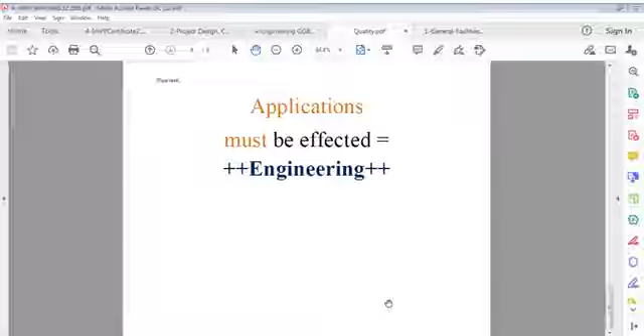Concentration has gone, I can say. Concentration is now relative, it's software. Software which has to be used as soft support. Actually, software has converted intellect into something which is useless. We have started thinking so much for software that software is my teacher, software my solution, and mind, intellectualism is defeated. This is my very much serious issue.

I am very much concerned about that. Whenever you see some posting, some design, something, they would say software says this, software says that. Are we living for software or is software working for us?

Computer is a tool everybody knows to assist us. But the state of its response is reverse. There is no contemplation now because templates are available. You can find templates on computers. They do their way and we think it's final.

I have not seen people talking of formalization. Take stat, take this, take that, use this, use that. So where do we stand? How shall our professionally developed minds work? In what way are we?

Are we just machines now? Are we just robots? Whatever we are given, we do? Or do we have a certain reliability coefficient, certain analytical coefficients, something empowered with us for synthesis.

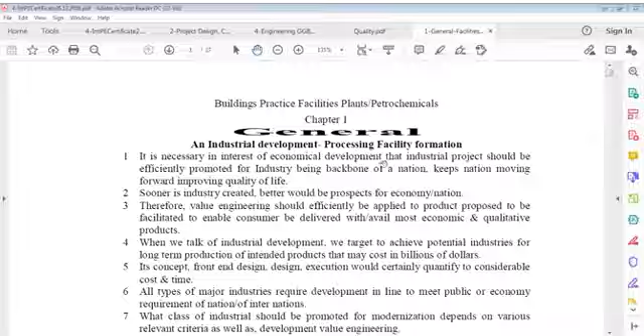I was somewhere, here if you see, I talked of this chapter 1, that was general. This chapter 1 was general, and what's this happening here? Industrial development projects and process facilities are talked of in this. And just to define why I'm talking about this, industrial development is very important. We talked of the policy decisions in this chapter. Then we talked of facilities requirement, facility justification and feasibility, and components. What components are available? What does it mean?

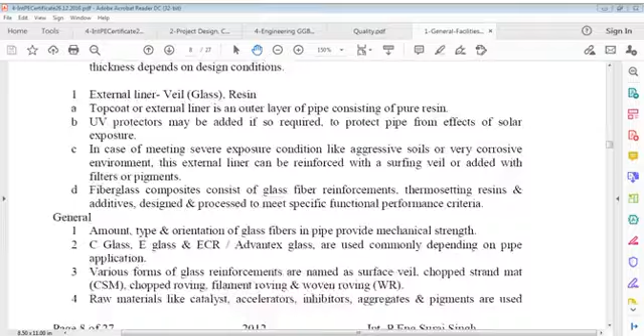And we talked of that, as well as LNG tanks, compressors, furnaces and other stationary equipment. Okay, we talked of FRP, GRP pipes. I think there were some supports also. We talked of RCC, receiving basin, etc. Flare towers, pump houses. I was somewhere here. So let us go back to where we have stopped.

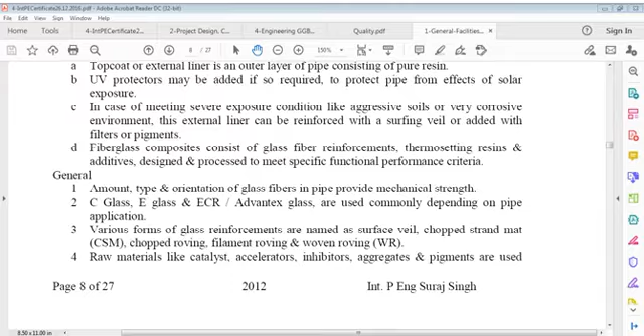We'll take a little overlapping here, because that reminds of the piping. FRP we discussed, layers we discussed generally, and also this. So pipe rack - okay, we come on to pipe rack. Let us start from there.

Pipe racks - I'm talking of industrial plants where tons and tons of structural steel is used, and hundreds of kilometers of pipes are laid, all classes of types. Pipe racks means these are structures, overground structures, ground structures, above overhead structures. These are like platforms on which pipes full of materials, full of whatever these pipes carry, of course, and these pipe racks are used to run those pipes, and this is throughout, you can say, on projects.

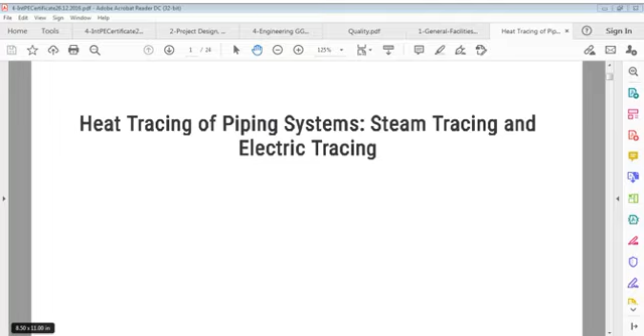In this heat tracing of piping system, we will cover types of pipe heat tracing, heat tracing design steps, general requirements for piping heat tracing system, description, and design requirements.

Pipe heat tracing is a generalized term relating to application of radiant heat input to piping systems from tubing attached to the outside of the pipe. Heat tracing is a process requirement.

Pipes carrying higher fluid temperatures than ambient temperature will lose temperature to surroundings. Insulation is a way to reduce this loss, but insulation is not 100% foolproof. So to make up that heat loss, small bore steam pipes or electrical wires known as heat tracers are attached to the parent pipe.

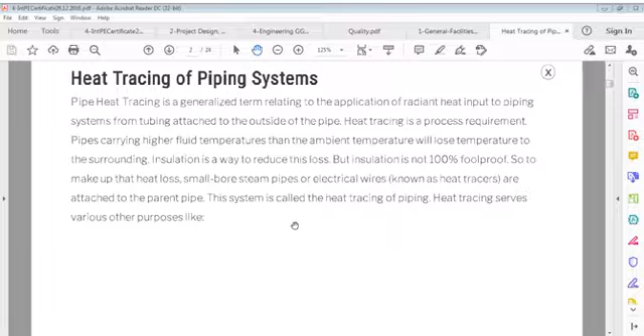This system is called heat tracing of piping. Heat tracing serves various other purposes, such as maintaining required temperature for process fluid, freeze protection, maintaining fluid viscosity, and snow and ice prevention.

Types of pipe heat tracing: Heat tracing can be grouped into two classes, fluid heat tracing or steam tracing, and electric tracing. In steam tracing of piping, steam is circulated through tubes that run alongside pipes to keep process fluid at desired temperature.

Other fluids like organics and glycols can also be used as tracing fluids. In heat tracing system design, however, there are various advantages of using steam as the heat tracing fluid, as mentioned below.

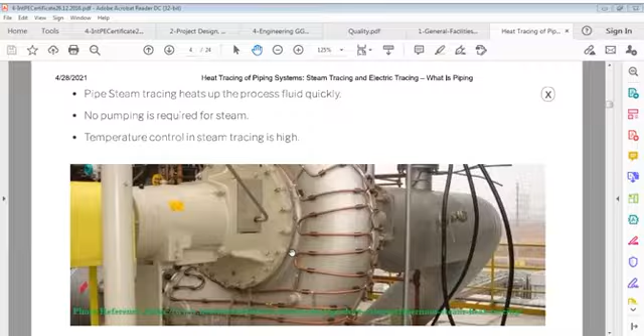Pipe steam tracing heats up process fluid quickly. No pumping is required for steam, and temperature control in steam tracing is high.

A steam tracing example is given here.

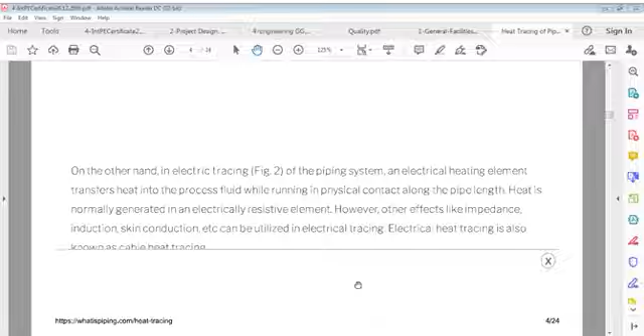Electrical tracing: in electrical tracing of piping systems, an electrical heating element transfers heat into process fluid while running in physical contact along the pipe length. Heat is normally generated in an electrically resistive element. However, other effects like impedance, induction, and skin conduction can also be utilized in electrical tracing. Electrical heat tracing is also known as cable heat tracing.

This is a reference given to the website for electric tracing, as you can see here.

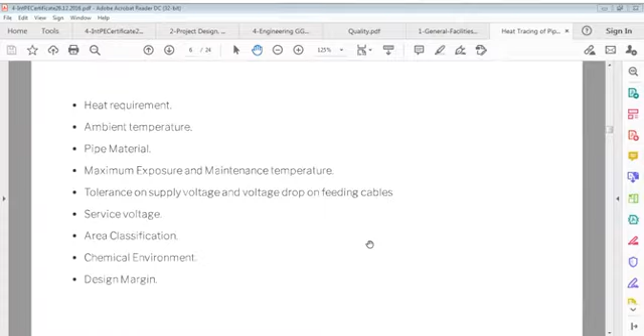Key design considerations include heat requirement, ambient temperature, pipe material, maximum exposure and maintenance temperature, tolerance on supply voltage and voltage drop on feeding cables, service voltage, area classification, chemical environment, and design margin.

Three types of pipe heat tracing cables are used for industrial electrical tracing systems: self-regulating polymer jacketed cables, mineral insulated cables, and skin effect heating cables.

Self-regulating polymer jacketed cables: these heat trace cables are suitable for temperatures up to 200 degrees Celsius and circuit lengths of up to 750 feet or 250 meters.

Mineral insulated heat trace cables are used for temperatures of 60 degrees up to 650 degrees Celsius, and circuit lengths of up to 3,300 feet, or approximately 1 kilometer.

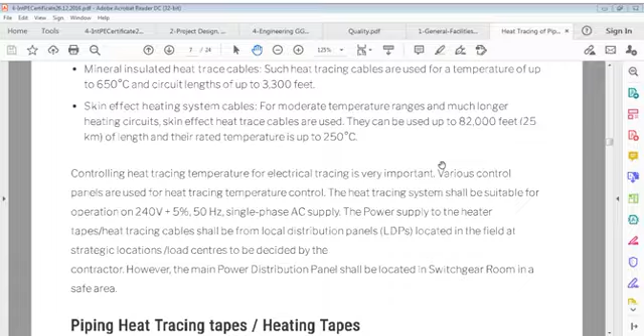Skin effect heating system: skin effect heat trace cables are used for moderate temperature ranges and much longer heating circuits. They can be used up to 25 kilometers in length, with a rated temperature of up to 250 degrees Celsius.

Controlling heat tracing temperature for electrical tracing is very important. Various control panels are used for heat tracing temperature control.

The heat tracing system shall be suitable for operation on 240 volts plus minus 5%, 50 Hz, single phase AC supply, providing power supply to the heater tapes.

Heat tracing cables shall be fed from local distribution panels (LDPs) located in the field at strategic locations, with load centers decided by the contractor. However, the main power distribution panel shall be located in the switchgear room in a safe area.

Piping heat tracing system.

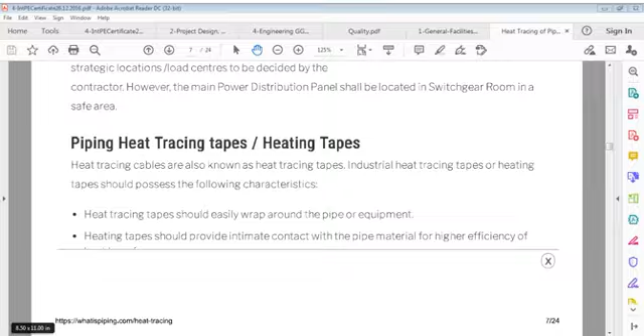Let us see where it is. Hold on, please. I'm here, hold on. Yeah, let's say yes. It's gone, it's missing, I think. Let's say yes.

Piping heat tracing tapes. Piping heat tracing tapes, heating tapes.

Heat tracing cables are also known as heat tracing tapes. Industrial heat tracing tapes or heating tapes should possess the following characteristics: the heat tracing tape should easily wrap around the pipe or equipment, and heating tapes should provide intimate contact with the pipe material for higher efficiency of the heat tracing tapes.

Efficiency of heat tracing tapes or heat tracing cables must be durable and long lasting. To prevent damage during overlapping, heat tapes should have a burnout proof feature. Heating tapes shall be suitable for use in areas defined in the process data sheet. Corrosion resistant metallic braid must be provided for safe and hazardous area applications. In hazardous area applications, surface temperature of heat tapes shall not exceed 200 degrees Celsius.

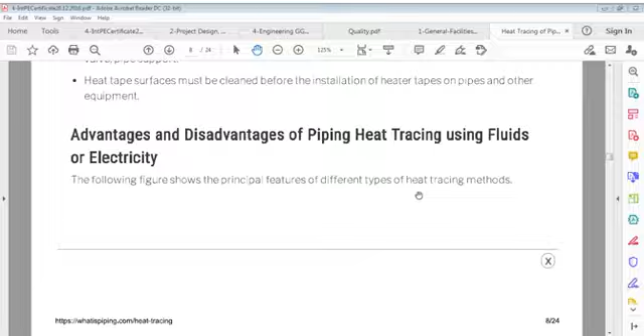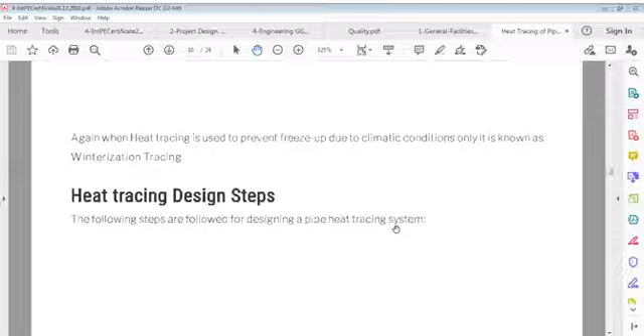When heat tracing is used to ensure that the system functions from a process standpoint regardless of climatic conditions, it's known as process control tracing. Again, when heat tracing is used to prevent freeze up due to climatic conditions only, it is known as winterization tracing. So there are two points: process control tracing, when heat tracing is used to ensure the system functions from a process standpoint regardless of climatic conditions, and winterization tracing, when heat tracing is used to prevent freezing up due to climatic conditions only.

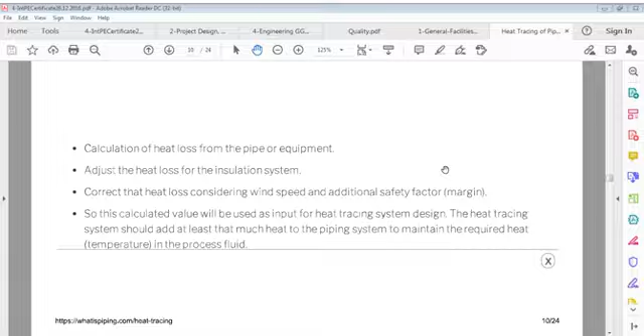Heat tracing design steps. The following steps are followed to design a pipe heat tracing system. I'm just giving a superficial study idea. Calculation of heat loss from pipe or equipment. Adjust heat loss for insulation system. Correct that heat loss considering wind speed and additional safety factor. This calculated value is then used as input for heat tracing system design. The heat tracing system should add at least as much heat to the piping system to maintain the required temperature in the process fluid.

General rule is steam tracing supply lines shall be taken from the top of the supply header to assure dry quality steam. This is a requirement, a rule for steam tracing. I'm just giving you this for general knowledge, you should know. I'm a civil engineer, so this isn't my job, but since we deal with plants and do so many things, these terms are very important sometimes. Steam tracing supply lines shall be taken from top of supply header to assure dry quality steam.

Identify locations for steam tracing supply manifolds and condensate manifolds early in design to reserve space in plant layout. This applies to non-steam supply and return manifolds such as hot oil, glycol, etc. Allow for an increase in insulation sizing to account for tracers.

Instrument application for heat tracing. Inline instruments can also be required to be heat traced as process conditions dictate. In that case, piping needs to provide steam supply and condensate collection manifolds for all other instruments. The break between piping traced instruments and control system traced instruments should match the drawing break between the two departments.

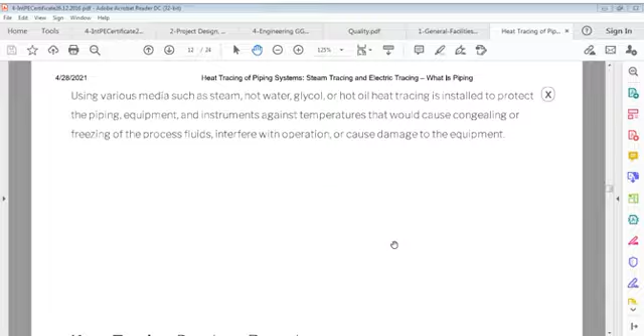Heat tracing design requirements. The daily average low temperature of the coldest month shall be used to select the low ambient design temperature, which then determines the degree of winterization protection required. No winterizing is required for water services except where a sustained temperature below minus 1 degree Celsius is often recorded for 24 hours or longer. Compressors, blowers and other mechanical equipment shall be specified for operation at the low ambient design temperature.

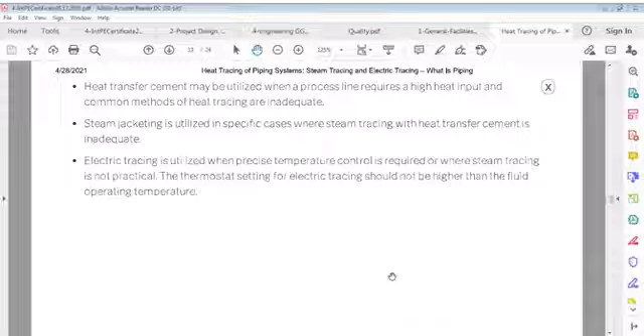Heat conservation while heat tracing. Heat transfer cement may be utilized when a process line requires high heat input and common methods of heat tracing are inadequate. Steam jacketing is utilized in specific cases where steam tracing with heat transfer cement is inadequate. Electric tracing is required or utilized when precise temperature control is required or where steam tracing is not practical. Thermostat setting for electric tracing should not be higher than the fluid operating temperature.

Thermostat setting for electric tracing should not be higher than fluid operating temperature.

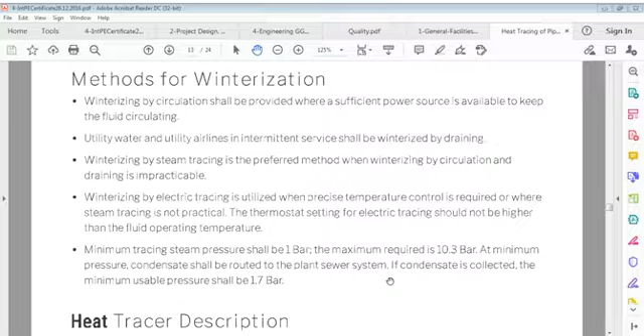Methods for winterization. Winterization by circulation shall be provided where a sufficient power source is available to keep fluid circulating. Utility water and utility air lines in intermittent service shall be winterized by draining. Winterization by steam tracing is the preferred method when winterizing by circulation and draining is impracticable. Winterizing by electric tracing is utilized when precise temperature control is required or where steam tracing is not practical. Thermostat setting for electric tracing should not be higher than fluid operating temperature.

Minimum tracing steam pressure shall be 1 bar. Maximum required is 10.3 bar. At maximum pressure, condensate shall be routed to the plant sewer system. If condensate is collected, minimum usable pressure shall be 1.7 bar. Heat tracer description.

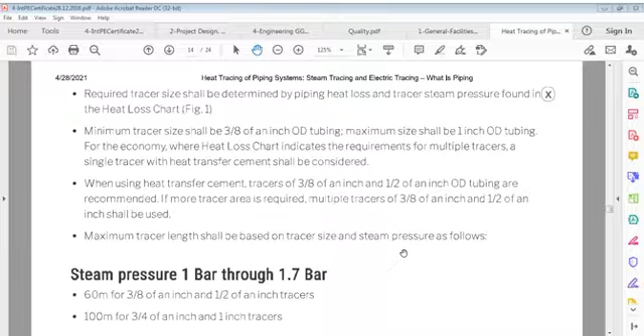Required tracer size shall be determined by piping heat loss and tracer steam pressure found in the heat loss chart. Let's see what that is, figure 1. Let me check if it's available here. We'll reach there shortly, just going through it to understand a little.

Minimum tracer size shall be 3/8 inch outside diameter tubing, maximum size shall be 1 inch OD tubing for economy. Where the heat loss chart indicates requirements for multiple tracers, a single tracer with heat transfer cement shall be considered. Using heat transfer cement, tracers of 3/8 inch and half inch OD tubing are recommended. If more tracer area is required, multiple tracers of 3/8 inch and half inch shall be used. Maximum tracer length shall be based on tracer size and steam pressure as follows.

Steam pressure 1 bar through 1.7 bar - this should be steam pressure 1 bar through 1.7 bar. So this is given in the specifications. Tracer length for heating tracer, all these are very much technical.

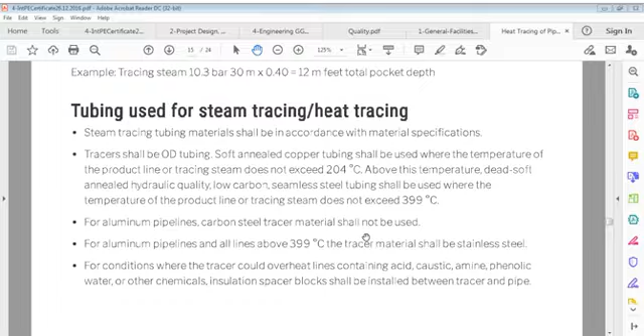Let's go see the tubing used for steam tracing, heat tracing. Steam tracing tubing material shall be in accordance with material specifications. The tracer shall be OD tubing, soft annealed copper tubing, used where temperature of product line or tracing steam does not exceed 204 degrees Celsius. Above this temperature, dead soft annealed hydraulic quality low carbon seamless steel tubing shall be used where temperature of product line or tracing steam does not exceed 399 degrees. For aluminum pipelines, carbon steel tracer material shall not be used. For aluminum pipelines and all lines above 399 degrees Celsius, tracer material shall be stainless steel.

For conditions where the tracer could overheat, lines containing acid, caustic, amine, phenolic, water or other chemicals - insulation spacer blocks shall be installed between tracer and pipe.

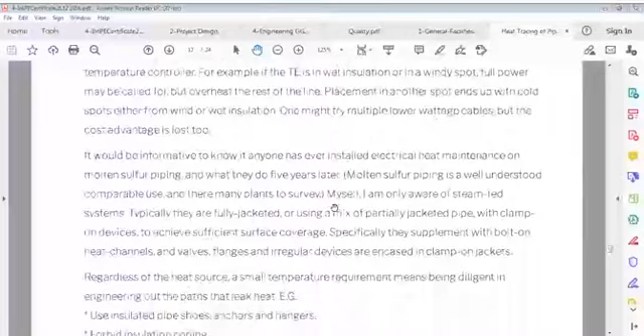So for heat tracing, let's come back to our own file. We referred to some detailed knowledge on heat tracing because it was very brief in this file. Maybe you'll get something important, or at least informative, if not important. That's the point of view we're interested in. So where was that heat tracing file? Yeah, it's there - pipe supports, sleepers.

These pipe supports or sleepers, we call them - I'm talking of big pipes, not a 1-inch or half-inch pipe. I'm talking of very big pipes, main pipes, you can say water pipes. These are used for carrying pipes at near ground levels. These are RCC units located at defined spacing - RCC units are not pipes, I'm talking of pipe supports, sleepers. Sleepers, very big sleepers, these are very heavy.

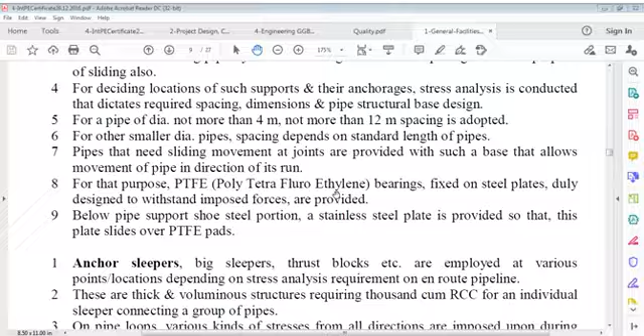For other smaller diameter pipes, spacing depends on the standard length of pipes. Pipes that need sliding movement at a joint are provided with such a base that allows movement of the pipe in the direction of its run. For that purpose, PTFE, usually called polytetrafluoroethylene, bearings fixed on steel plates, duly designed to withstand imposed forces, are provided. Below the pipe support shoe's steel portion, a stainless steel plate is provided so that this plate slides over the PTFE pads.

Anchor sleepers, this is now called anchor sleeper. It's a big one, big sleeper. Big sleepers, thrust blocks, etc. are employed at various points and locations, depending on stress analysis requirements or results on en route piping.

These are thick and voluminous structures requiring thousands of cubic meters of RCC for an individual sleeper connecting a group of pipes. On pipe loops, various kinds of stresses from all directions are imposed during operations or flows, which are resisted by these sleepers.

Again, on pipe loops, various kinds of stresses from all directions are imposed during operations or flows, which are resisted by these sleepers. At changes in direction of pipe routes as well as at T locations, big sleepers or thrust blocks are provided to resist resultant forces. These sleepers are constructed as RCC massive blocks.

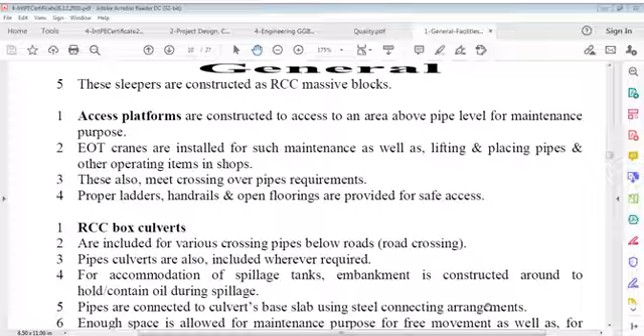These also meet crossing over pipes requirements, and proper ladders, handrails and open floorings are provided for safe access. This is the ordinary specification requirement for access platform.

Now RCC box culvert, what is that? The name is clear, RCC, but box culvert - these are included for various crossing pipes below roads, road crossings. Pipe culverts are also included wherever required for accommodation of spillage tanks.

Embankment is constructed around to hold and contain oil during spillage. For accommodation of spillage tanks, embankment is constructed around to contain oil during spillage. Pipes are connected to the culvert's base slab using steel connecting arrangements. Enough space is allowed for maintenance purposes, for free movement as well as circulation.

Let me check if I have some box culvert details here. Possibly I had, I will try to show you that one. Box culvert, if I can find that. Let me see sketches here, method sketches here. Let me see, precast covers. Box culvert, I see, box culvert. You see, this is box culvert here.

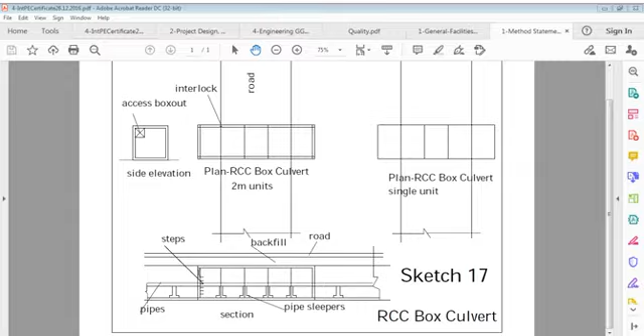So that's the RCC box culvert I explained to you. Then receiving basin - I close that box culvert now, unnecessary loading on this has no meaning, so I close this.

Receiving basin, receive means something to receive. It's meant for collection of used water from the processing unit.

It's meant for collection of used water from processing units for the intended purpose of further discharge into the provided outfall at sea. It basically means whatever water we use for circulation to cool plants, machines, etc. That water is used many times, and after that you have to dispose of it back to sea, and that can be done through the outfall structure.

To send it to the outfall structure we have to use some basin, and that is defined here as the receiving basin. This basin is given a considerable structure size for collecting water from various returning piping headers discharge, letting it accumulate and then dispose into the outfall channel for further permanent discharge into sea, its original source. Various types of steel stop logs are installed to control flow according to the provided capacity of channel and receiving basin, keeping abreast also the relevant maintenance function of provided piping. The structure consists of RCC retaining walls in flow direction and RCC base slab. So that is this receiving basin.

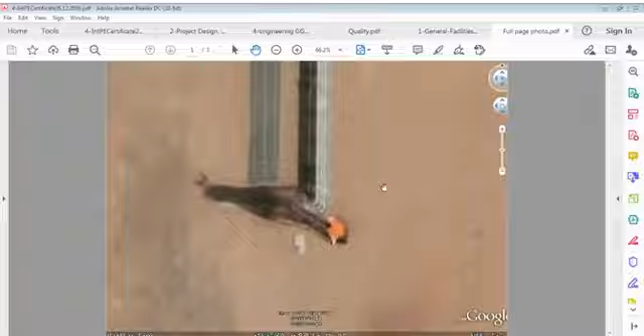Now, pump houses. Pump houses are installed as large size and highly elevated steel buildings housing a train of various pumps, electrical equipment, chlorination plant, rotary drums, intake equipment, etc.

Piping is routed on ground vertically as well as horizontally on various types of supports having complex design. Various types of structural steel access platforms are built in for operational and maintenance purposes. Water is pumped into supply manifolds located just outside where chlorination is applied, and pipes are run to the main route on ground up to various industrial users. Hundreds of thousands of cubic meter RCC structures are built for supporting bases as well as for anchoring arrangements depending on the pipe route dictating the supporting requirement.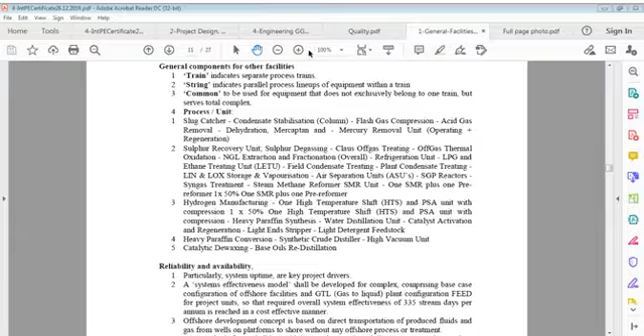Okay gentlemen, I'm back here to be with you again. And here it's talking of something which is very important: general components for other facilities. That is - train, string, common, process unit, sector.

These are now train, as I said, it's a continuation of certain machines or equipment, vessels for processing. Train indicates separate process trains. String indicates parallel process lineups of equipment within a train. So string plus a string, you may say, equals train. Whatever is parallel to process, same processing, in same train, is called a string. A string means parallel process lineups of equipment within a train. So a train can contain many strings, you may say.

Common, to be used for equipment that does not exclusively belong to one train, but to several trains - the whole complex, you may say - is called common. It's used for equipment that doesn't exclusively belong to one train but serves the total complex. Now, process unit.

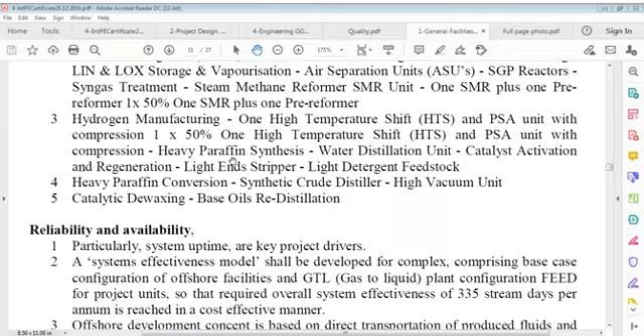I'm just giving you certain names of these plants, not to discuss in detail, because this is beyond the scope of civil engineering. But just for information, as a coordinational work, we should know something about them if we work on a plant - not technical details, but some information so that we can deal with other people, at least the names of machines and their purposes, names of equipment and their purposes on that processing plant. That's enough for us. I'm not going into details of this because it's beyond my specialization, but a cover-up has been done so we know where coordination stands, what we have to do, because all this equipment must have foundations, must have bases, and we have to excavate for them. We have to install these vessels on those foundations, and we have to do maybe somewhere grouting, cement grouting or epoxy grouting between the base plates of this equipment and the concrete.

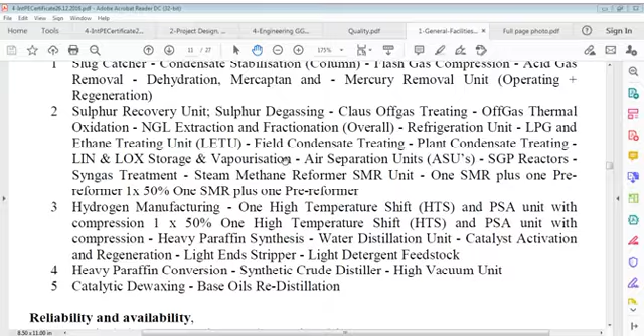So we should at least know what sort of names, drawings, or designs we would have. We should not be surprised to get that, and that's the purpose behind this. I'm not going into details of that - if I go into details, it will take too long.

Now, reliability and availability - what is reliability and availability of this? Ultimately, we are talking about system quality, and that's a very important thing we should know about.

Reliability and availability, particularly system uptime, are key project drivers.

A system's effectiveness model shall be developed for the complex, comprising base case configuration of offshore facilities and gas to liquid plant configuration, feed for project units - when I say feed, I mean Front End Engineering Design - so that the required overall system effectiveness of 335 stream days per annum is achieved in a cost effective manner. Effectiveness model, that's the question here.

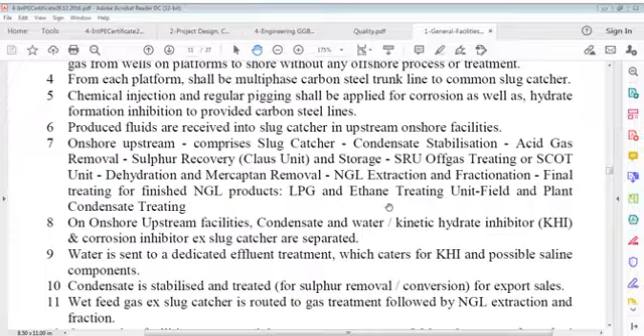Onshore upstream facilities: condensate and water, kinetic hydrate inhibitor and corrosion inhibitor are separated at the slug catcher.

Water is sent to a dedicated effluent treatment which caters for kinetic hydrate inhibitor and possible saline components. Condensate is stabilized and treated for sulfur removal, conversion for export sales.

Wet feed gas from the slug catcher is routed to gas treatment followed by NGL extraction and fractionation. Gas treating facilities remove sulfur components, water, carbon dioxide and mercury from the feed gas.

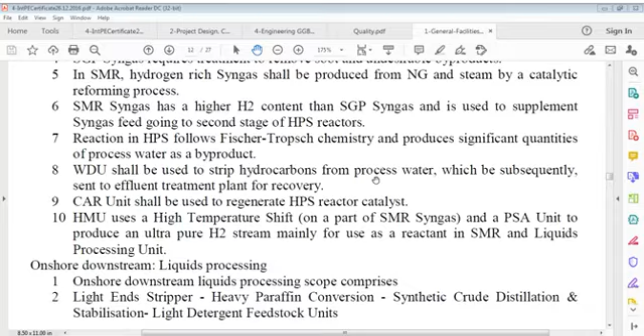Onshore downstream synthesis - now what is that? Onshore downstream synthesis comprises the gasification process. So many processes are there, you can see here, but these are not directly related - just read them to know what happens, for some information only.

Gasification process means: air separation units, heavy paraffin synthesis, catalyst activation and regeneration, water distillation, steam methane reformer, hydrogen manufacturing. The ASU's main purpose shall be to produce oxygen for use in SGP, as well as to produce HP nitrogen for the CAR unit, LP nitrogen, and compressed air for use as site utility.

In SGP, syngas is produced from natural gas and oxygen by partial oxidation. Syngas produced is the majority of syngas for subsequent conversion to synthetic heavy paraffin stream in HPS. SGP syngas requires treatment to remove soot and undesirable byproducts.

In SMR, hydrogen-rich syngas is produced from natural gas and steam by a catalytic reforming process. SMR syngas has a higher H2 content than SGP syngas and is used to supplement syngas feed going to the second stage of HPS reactors. HPS reaction follows Fischer-Tropsch chemistry and produces significant quantities of process water as a byproduct.

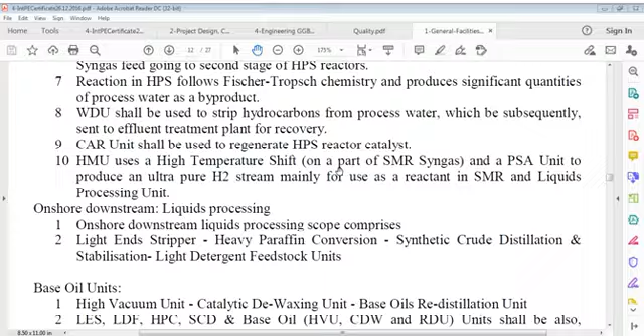Now, onshore downstream liquid processing. Onshore downstream liquid processing scope comprises light ends stripper, heavy paraffin conversion, synthetic crude distillation and stabilization, light detergent feedstock units, base oil units.

Also in continuation, it has some knowledgeable part. And maybe I don't take all of it today, only some, because too heavy a dose is not good.

High vacuum unit, catalytic dewaxing unit, base oils redistillation unit. These are just names you read or I read, it doesn't matter. I'm not going to explain each one, it's not in my capacity, just to read for you.

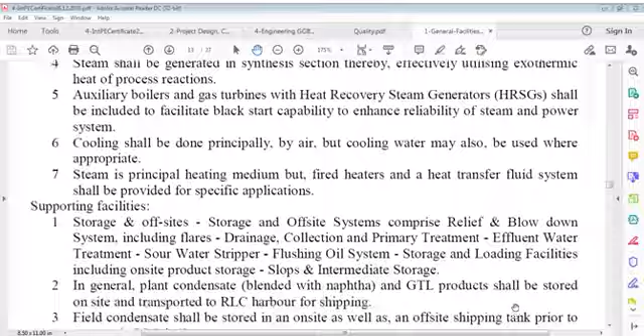Some systems here for information purposes only, 2 pages I think. 2 pages only, then we will jump on to our total discussion, a specific one.

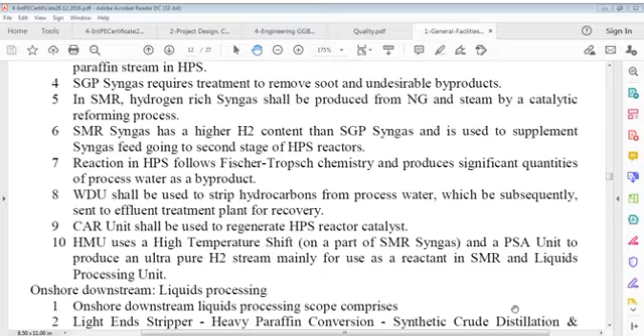Synthesis comprises of this, which you see. I did that. And also I'll take here, this is also another one.

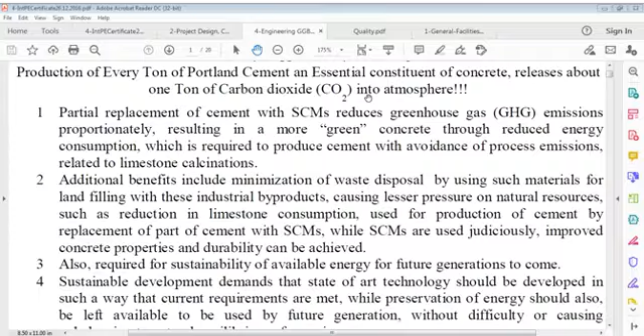I was talking yesterday about this, about use of supplementary cementing materials. I talked yesterday on this a little. So we continue again for this purpose, because supplementing cementing materials, here it is. So let us do a little on this.

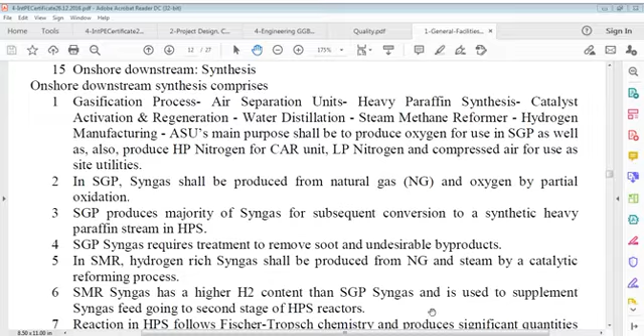Downstream synthesis comprises of syngas. We have gone through here, we have done this. So we'll go to the onshore downstream liquid processing.

Onshore downstream liquid processing scope comprises of - that's what is important here. Onshore downstream liquids processing scope comprises light ends stripper, heavy paraffin conversion, synthetic crude distillation and stabilization, light detergent feedstock units.

These are just names, and we should know the base oil unit too. This onshore downstream liquid processing is: light ends stripper, heavy paraffin conversion, synthetic crude distillation and stabilization, light detergent feedstock units. Base oil units, high vacuum unit, catalytic dewaxing unit, base oils redistillation unit.

Then there are certain short forms here: LES, LDF, HPC, SCD - all these units shall also collectively be referred to as liquid processing unit or LPU, liquid processing units.

In LES unit, water, carbon monoxide and carbon dioxide are removed. In LDF unit, components shall be recovered and after hydrogenation run down to storage for sale as product.

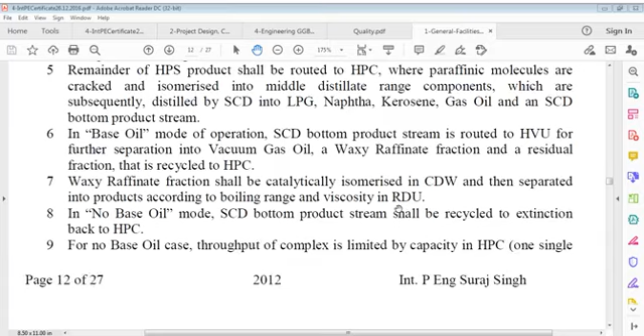And closed cooling water system, instrument and tool air system, nitrogen system, heat transfer fluid system, aqueous ammonia system. So these are supporting utilities, whereas the earlier ones were base oil units, onshore liquid processing and oil processing. Now these are supporting systems or utility systems: cooling water system, instrument and tool air system, nitrogen system, heat transfer fluid system, aqueous ammonia system. These are utility systems. Utility systems shall be designed to allow stand-alone operation of the GTL, gas to liquid complex.

Steam and gas turbines shall be provided for shaft power and generation of electrical power. Steam shall be generated in the synthesis section, thereby effectively utilizing the exothermic heat of the process reaction. Auxiliary boilers and gas turbines with heat recovery steam generators (HRSG) shall be included to facilitate black start capability to enhance reliability of the steam and power system.

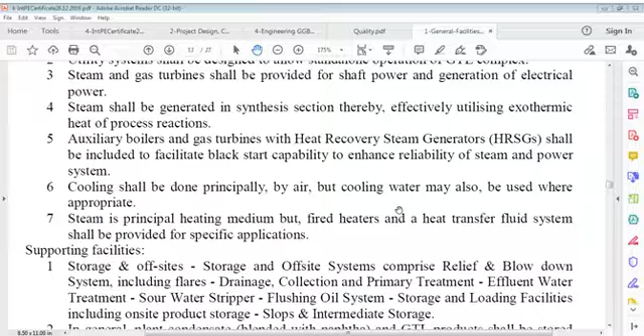Cooling shall be done principally by air, but cooling water may also be used where appropriate. Steam is the principal heating medium, but fired heaters and a heat transfer fluid system shall be provided for specific applications.

Now supporting facilities. This was your utility system; supporting facilities are storage and off-sites. Storage and off-site systems comprise relief and blowdown system including flares, drainage, collection and primary treatment, effluent water treatment, sour water stripper, flushing oil system, storage and loading facilities including on-site product storage, slops and intermediate storage. In general, plant condensate blended with naphtha

and GTL products shall be stored on site and transported to RLC harbor for shipping. Field condensate shall be stored in an on-site as well as an off-site shipping tank prior to export via RLC harbor. LPG shall be transported directly to RLC facilities for refrigeration, storage and export. Liquid sulfur shall be piped to common RLC facilities.

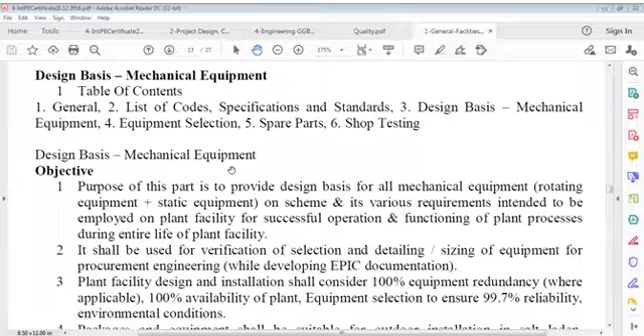Table of contents: general, list of codes, specifications and standards, design basis, mechanical equipment selection, spare parts, shop testing. These are mechanical equipment related. Now what is there to think of? Mechanical equipment.

Purpose of this part is to provide design basis for all mechanical equipment, rotating equipment and static equipment, both on scheme and its various requirements, intended to be employed on the plant facility for successful operation and functioning of plant processes during the entire life of the plant facility.

Purpose of this part is to provide design basis for all mechanical equipment, may be rotating or may be static, on scheme and its various requirements, intended to be employed on the plant facility for successful operation and functioning of plant processes during the entire life of the plant facility. It shall be used for verification of selection and detailing, sizing of equipment for procurement, engineering, while developing EPIC documents.

Plant facility design and installation shall consider 100% equipment redundancy where applicable, 100% availability of plant. Equipment selection to ensure

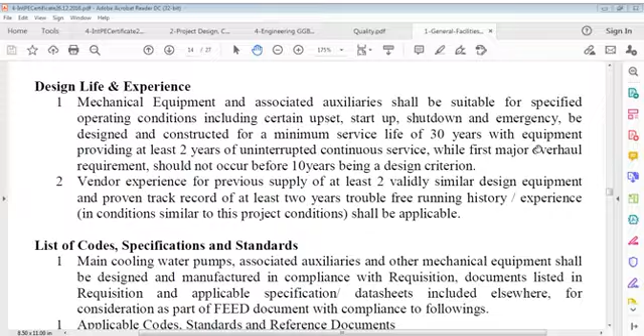List of code specification standards, these are there. I'm just reading, not going into details of that, because the list of codes is changing, and this is very old, but you can say some categories, I think.

Main cooling water pumps, associated auxiliaries, and other mechanical equipment, be designed and manufactured in compliance with requisition documents listed in the requisition and applicable specification.

Data sheet included elsewhere for consideration as part of FEED document with compliance to the following: applicable codes, standards, and reference documents. That's a must. Equipment specification lists applicable international codes and standards. Reference to named standards or codes shall mean the latest edition of the standard or code, including addenda, supplements or revisions thereto as of the effective date of contract.

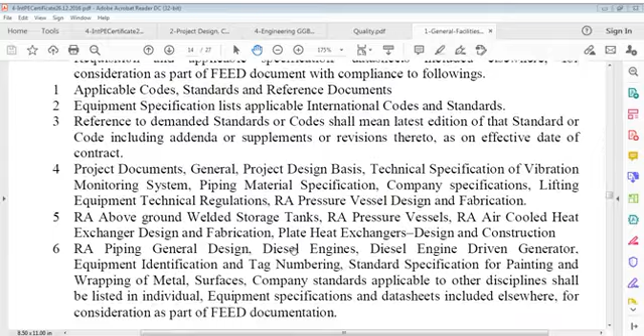Now these codes I'm not going to give because there's no meaning. Now what to do? The main principle to be adopted during selection and specification of prime equipment and equipment within the proposed package can be summarized as follows: design life of facility being 30 years, high availability, standard proven equipment model, safe to operate and maintain. Typical subjects to be addressed and considered during equipment selection and final preparation of purchase acquisition are addressed in the following sections.

Nameplates indicating major design parameters, specified parameters, be screw attached to equipment. Nameplates shall be in stainless steel 316 material. Equipment standardization.

Design of rotating mechanical equipment shall ensure high equipment availability and maintainability. Effort shall be made to standardize spares stocking by minimizing variety of makes and types of auxiliary equipment used within the package. This standardization be applied so far as it doesn't interfere with selection of an optimal condition or solution for specified operating conditions, and duly considered equipment to minimize spares stocking.

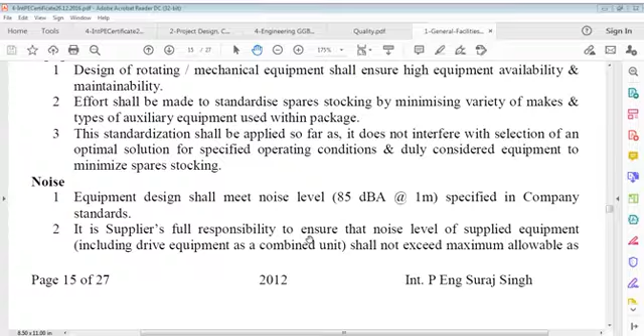Noise. Equipment design shall meet noise level 85 dBA at 1 meter specified in company standard. It's the supplier's full responsibility to ensure that the noise level of supplied equipment, including drive equipment as a combined unit, shall not exceed the maximum allowable as specified in the project HSE plan.

Effort shall be made to select equipment with low noise level. Where it's not feasible despite best design available, acoustic enclosures and/or acoustic insulation shall be provided - and you know what acoustic means, related to sound. Supplier shall submit estimated noise level and consider advised measures that would be applied when equipment noise level exceeds the allowed noise level.

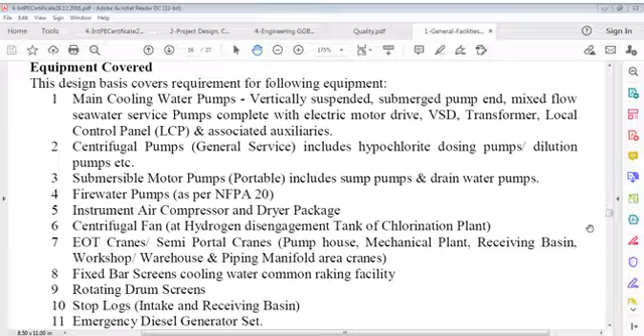Centrifugal pumps general service includes hypochlorite dosing pumps, dilution pumps, etc. Submersible motor pumps, portable, includes sump pumps and drain water pumps. Fire water pumps according to NFPA 20. Instrument air compressor and dryer package. Centrifugal fan at hydrogen disengagement tank of chlorination plant.

Electric operated cranes, semi-portal cranes, pump house, mechanical plant, receiving basin, workshop, warehouse and piping manifold area cranes. Fixed bar screens, cooling water, common raking facility, rotating drum screens, stop logs, intake and receiving basin, emergency diesel generator set, vessel and storage tanks, electrochlorination plant equipment.

Equipment selection. Main cooling water pump set.

Electric motor driven through VSD, vertically suspended submerged end mixed flow seawater service line shaft pumps with right angle discharge head shall comply with project specifications requirements, HIS standards, and in general compliance to API 610 standards where applicable for this service, such as pump rotor dynamics, vibration levels, line shaft and thrust bearing design criteria.

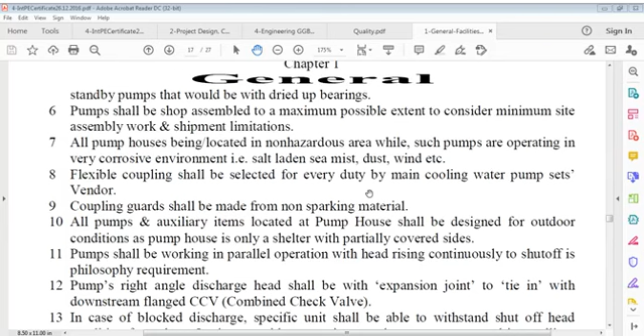All pump houses being located in non-hazardous area, while such pumps are operating in very corrosive environment, that is salt-laden sea mist, dust, winds, etc.

Flexible coupling shall be selected for every duty by main cooling water pump sets vendor. Coupling guards shall be made from non-sparking materials.

So I think we should take it later. There's so many, and I have to talk of something else also. We'll take this later now because it is different. I'll talk on SCMs, which is also important from this viewpoint. I'll come back in two minutes and talk on this, which is also very important. Supplementary cementing materials for construction, of course very significant. Let's take some part of this in our talk.

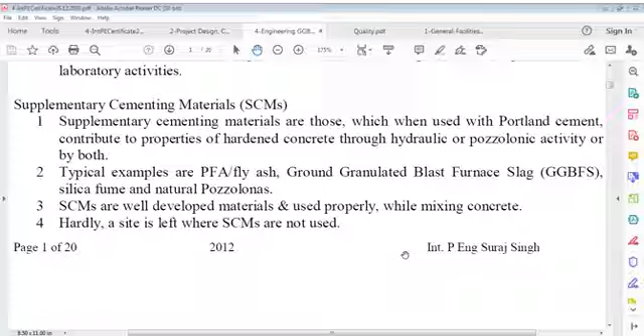The reasons can be stated as follows: every ton of Portland cement, when used, releases about one ton of carbon dioxide into the atmosphere.

If we partially replace Portland cement with supplementary cementing materials, we can reduce greenhouse gas emissions proportionately, resulting in more green concrete through reduced energy consumption required to produce cement, with avoidance of process emissions related to limestone calcination.

Additional benefits include minimization of waste disposal by using such materials for landfilling with these industrial byproducts, causing lesser pressure on natural resources, such as reduction in limestone consumption used for production of cement by replacement of part of cement with SCMs.

While SCMs are used judiciously, improved concrete properties and durability can be achieved. Also required for sustainability of available energy for future generations to come.

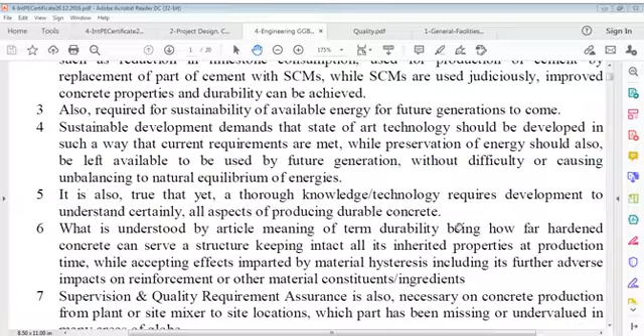We can define this as: sustainable development demands that state-of-art technology should be developed in such a way that current requirements are met, while preservation of energy should also be left available to be used by future generations without difficulty or causing unbalancing to natural equilibrium of energies.

It's true, yet thorough knowledge of technology requires development to understand certainly all aspects of producing durable concrete. Durable concrete is a very important term.

What's understood by the meaning of the term durability is how far hardened concrete can serve a structure, keeping intact all its inherited properties at production time, while accepting effects imparted by material hysteresis, including its further adverse impacts on reinforcement or other material constituent ingredients.

Supervision and quality requirement assurance is also necessary on concrete production, from plants or site mixers to site locations, which part has been missing or undervalued in many areas of the globe.

Thorough knowledge of concrete durability or other properties requires good understanding by personnel working on concrete.

In particular, qualified site supervisors, semi-qualified site supervisors, site consultants, and site foremen must be trained to understand as well as apply quality demands to achieve durable status of concrete.

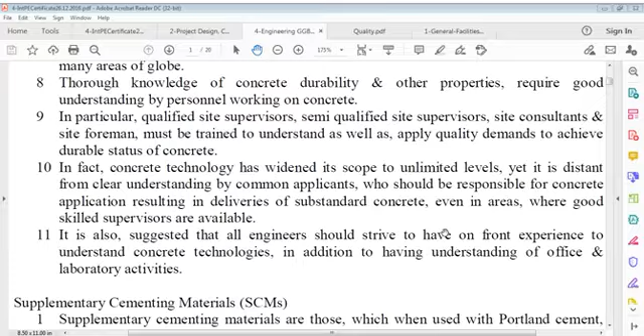In fact, concrete technology has widened its scope to unlimited areas, unlimited levels. Yet it is distant from clear understanding by common applicants who should be responsible for concrete application, resulting in deliveries of substandard concrete even in areas where good, skilled supervisors are available.

It's also suggested that engineers should strive to have on-front experience to understand concrete technology, in addition to having understanding of office and laboratory activities.

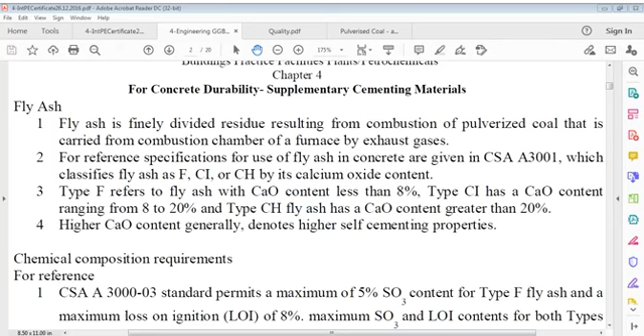A coal-fired thermal power station is a power plant in which the prime mover is steam driven. Water is heated, turns into steam and spins a steam turbine which drives an electrical generator as schematically shown. After it passes through the turbine in 1 to 3 stages, steam is condensed in a condenser and recycled to where it was heated. This is known as the Rankine cycle.

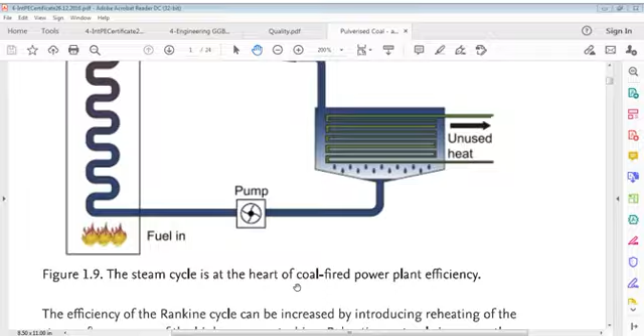The steam cycle is at the heart of coal fired power plant efficiency. This is the turbine, electricity out, steam to turbine, electricity out, and it's heated here, and we get fuel in from this, and this is unused heat. This doesn't go to the turbine but goes back again, and this is the Rankine cycle.

What it says again: a coal fired thermal power station is a power plant in which the prime mover is steam driven. Water is heated, turns into steam and spins a steam turbine which drives an electrical generator as schematically shown. After it passes through the turbine, steam is condensed in a condenser and recycled to where it was heated. This is known as the Rankine cycle.

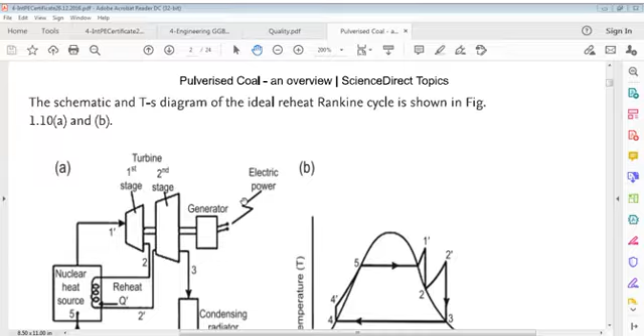Schematic and T-s diagram of the ideal reheat Rankine cycle. You can see this ideal Rankine cycle.

Nuclear heat source goes to stage 1, reheat, say it goes here. W is pump. This says it goes, let's say here. Nuclear heat source goes here, stage 1 turbine goes back to reheat, and stage 2. So stage 1 is here, goes here, it also goes there, goes here and heats, and again goes here to stage 2, and then back to stage 3 here, condensing radiator, and this is the generator, and then electric power, and this is condensing radiator and the pump, and like this.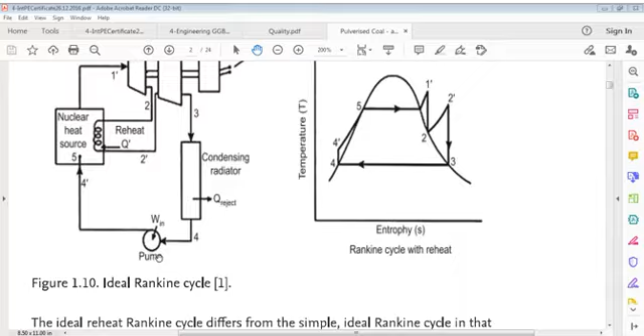Ideal Rankine cycle, and this is entropy, you know entropy, what entropy is. Rankine cycle with reheat, and that's entropy as it was in applied thermodynamics I studied, and temperature is here, entropy and temperature. You can see higher temperature up to here, and then coming down. So if you compare it to that one, number one is here, this temperature range, then 2 comes down, temperature comes down, then it goes to 2 dash, again down a little, and then to 3, which is the condensing radiator. Then comes number 4, again 4 here like this, and goes to 5. This is the Rankine cycle with reheat.

Ideal reheat Rankine cycle differs from the simple ideal Rankine cycle in that the expansion process takes place in two stages. In the first stage, the high pressure turbine, steam is expanded isentropically to an intermediate pressure and sent back to the boiler, where it is reheated at constant pressure, usually to the inlet temperature of the first turbine stage. Steam then expands isentropically in the second stage, the low pressure turbine, to condenser pressure.

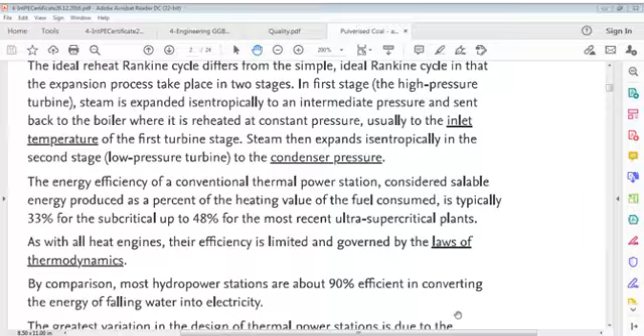So we can say, as we discussed, the energy efficiency of a conventional thermal power station, considered as saleable energy produced as a percent of the heating value of fuel consumed, is typically 33% for subcritical, up to 48% for the most recent ultra supercritical plants. As with all heat engines, their efficiency is limited and governed by the laws of thermodynamics. By comparison, most hydropower stations are about 90% efficient.

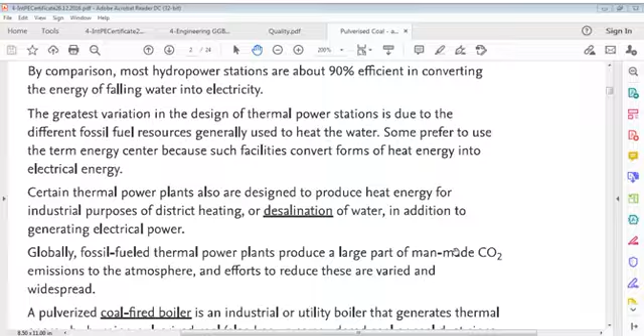Most hydropower stations are 90% efficient in converting the energy of falling water into electricity. The greatest variation in design of thermal power stations is due to the different fossil fuel resources generally used to heat water. Some prefer the term energy center because such facilities convert a form of heat into electrical energy. Certain thermal power plants are also designed to produce heat energy for industrial purposes like district heating or desalination of water, in addition to generating electrical power.

Globally, fossil fueled thermal power plants produce a large part of man-made carbon dioxide emissions to the atmosphere, and efforts to reduce these are varied and widespread.

A pulverized coal-fired boiler is an industrial or utility boiler that generates thermal energy by burning pulverized coal, also known as powdered coal or coal dust, since it is as fine as face powder in cosmetic makeup, that is blown into the firebox. The basic idea of a firing system using pulverized fuel is to use the whole volume of the furnace for combustion of solid fuels. Coal is ground to the size of a fine grain, mixed with air, and burned in the gas flow. Biomass and other materials like waste can also be added to the mixture.

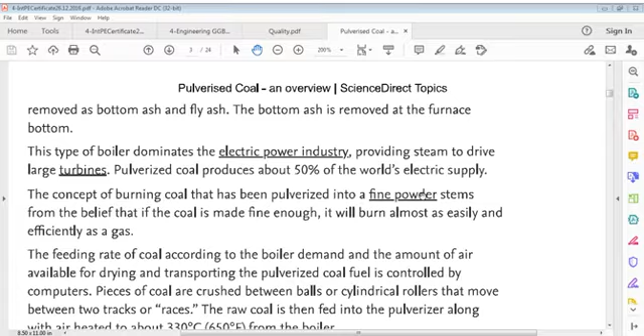Coal contains mineral matter that is converted to ash during combustion. Ash is removed as bottom ash and fly ash. Bottom ash is removed at the furnace bottom. This type of boiler dominates the electric power industry.

Providing steam to drive large turbines, pulverized coal produces about 50% of the world's electric supply. The concept of burning coal that has been pulverized into fine powder stems from the belief that if coal is made fine enough, it will burn almost as easily and efficiently as gas.

Feeding rate of coal according to boiler demand and amount of air available for drying and transporting pulverized coal fuel is controlled by computers. Pieces of coal are crushed between balls or cylindrical rollers that move between two tracks or races. Raw coal is then fed into pulverizer along with air heated to about 330 degrees Celsius.

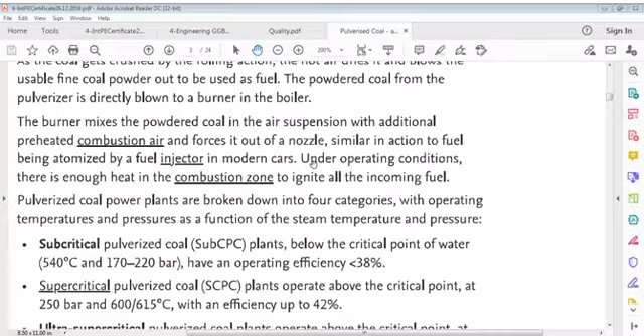Powdered coal from pulverizer is directly blown to a burner in boiler. Burner mixes powdered coal in air suspension with additional preheated combustion air and forces it out of a nozzle, similar in action to fuel being atomized by a fuel injector in modern cars. Under operating conditions, there is enough heat in the combustion zone to ignite all incoming fuel.

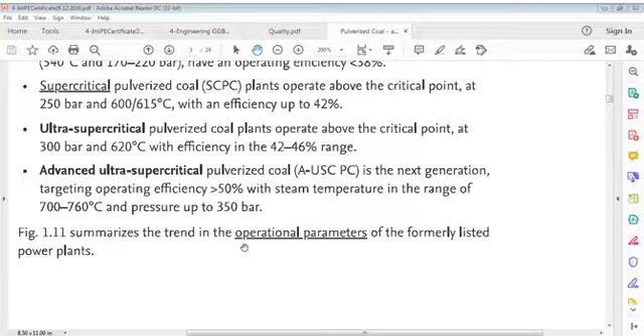Supercritical pulverized coal plants operate above the critical point at 250 bar and 615 degrees Celsius with efficiency up to 42%. Ultra supercritical pulverized coal plants operate above critical point at 300 bar and around 620 degrees Celsius with efficiency in the 42 to 46% range. Advanced ultra supercritical pulverized coal is the next generation, targeting operating efficiency greater than 50% with steam temperature in range of 700 to 760 degrees Celsius and pressure up to 350 bars.

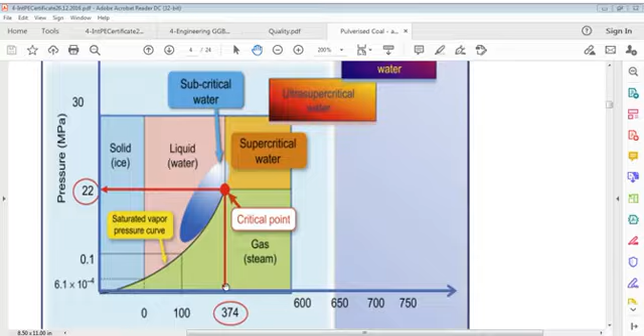The saturated pressure curve shows that if pressure is rising, temperature is also rising. This is solid ice here because pressure is more and temperature is less. This is liquid water, where pressure is more and temperature rises. Here you can say this is the water area, and this is the supercritical water region, with both temperature and pressure higher. The critical point is at temperature 374 degrees Celsius with pressure 22 MPa, and beyond that is the gas steam. So: solid ice, liquid water, saturated vapor pressure curve, supercritical water, and gas steam. This is the water equilibrium diagram.

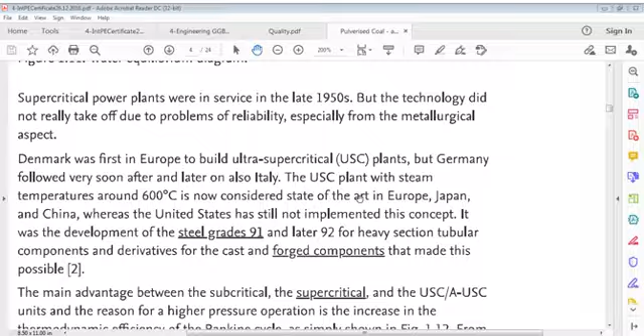Supercritical power plants were in service in the late 1950s, but the technology did not really take off due to problems of reliability, especially from metallurgical aspects. Denmark was first in Europe to build ultra supercritical plants, but Germany followed very soon after, and later on also Italy. The ultra supercritical plant with steam temperatures around 600 degrees Celsius is now considered state of the art in Europe, Japan and China, whereas the United States has still not implemented this concept. It was the development of steel grade 91 and later 92 for heavy section tubular components, and derivatives for cast and forged components, that made this possible.

The main advantage between subcritical, supercritical and USC units, and the reason for higher pressure operation, is the increase in thermodynamic efficiency of the Rankine cycle.